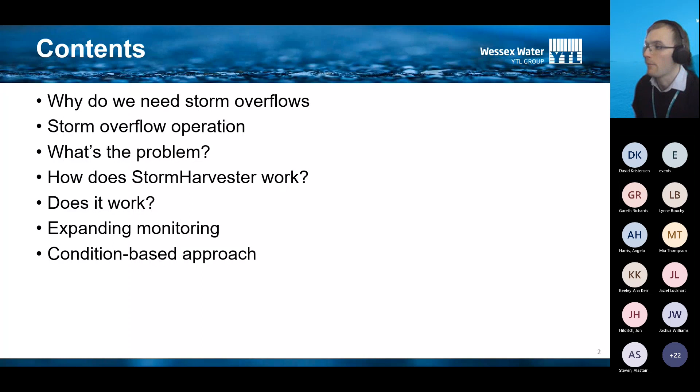As a quick run through of what I'm going to cover: I'll start with some background about the network, what's actually physically going on. Then I'll move on to what our problem is, the challenge we're trying to solve. Then how StormHarvester works, the program and the company. Then into the results, does it work? And then further into how we're looking to expand the work we're doing in terms of monitoring and also the condition-based maintenance approach.

So starting off with why do we need storm overflows. They're basically relief valves for our wastewater system, our sewage system. Hopefully this diagram shows a house and industrial buildings discharging foul waste into our sewage system, which flows down to the water recycling centre, or sewage treatment works. However, in wet weather, rain runoff from roofs and roads will also go in and fill the sewer, and hopefully most of that should also merrily flow off down to the water recycling centres.

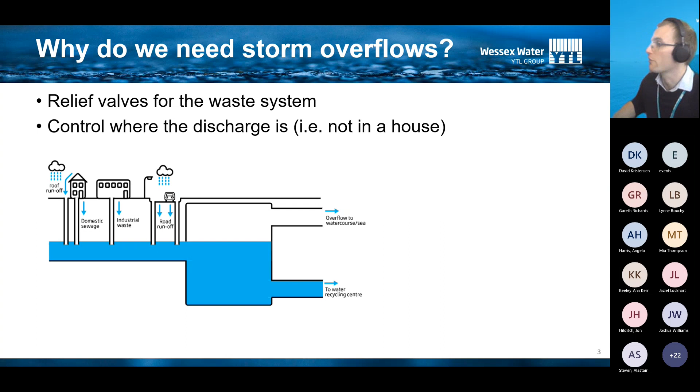But if there's too much coming in, we'll fill up all the capacity of our sewers, and they have to go somewhere else. So we discharge them to permitted locations, usually the sea, a river, a brook, or potentially a wetland like a reedbed wetland for treatment. The reason we do that is because if we didn't, and the system got over capacity and surcharged, it would have to come out at the weakest point, which would probably be someone's toilet, and then we have a customer problem, a public health issue. So that's roughly how the system works and why the storm overflows are there to start with.

I thought it'd be important to address why this gets into the news today, rather than just trying to avoid it. Basically, this links in because we're using StormHarvester to use the data we feed it with our storm overflow information, and that's why this is relevant. I'm sure you'll be more than aware of all the stories that have been in the papers and the press for the past few years.

You might have read comments about water companies dumping or spewing sewage into the seas or rivers. There are lots of negative stories out there, but that's misrepresentative, because we're not actually discharging a thick brown liquor into rivers or the sea.

In wet weather, primarily what's going out to discharge is rainwater, because we're filling our sewer capacity up with rainwater and storm flows. But it's not just rainwater, because much like if you had a bottle of Coke, drank most of it, and some dregs left at the bottom, if you then fill that with tap water, you wouldn't still have perfectly clear tap water left, it would be slightly dirty. Similarly, if we fill our sewers with storm water, what comes out from our storm overflows is going to pick up some of the foul waste in there too.

The major concerns about storm overflow operation come down to water quality, but simply stopping all storm overflow operations today, tomorrow, this week wouldn't necessarily have that big an impact on water quality. There's still work going on in this, but think about it sensibly: if what's going into the sewers is storm water, and what's flowing out from storm overflows is also rainwater, then the extra rainwater in rivers and the sea is not going to make that much difference to water quality.

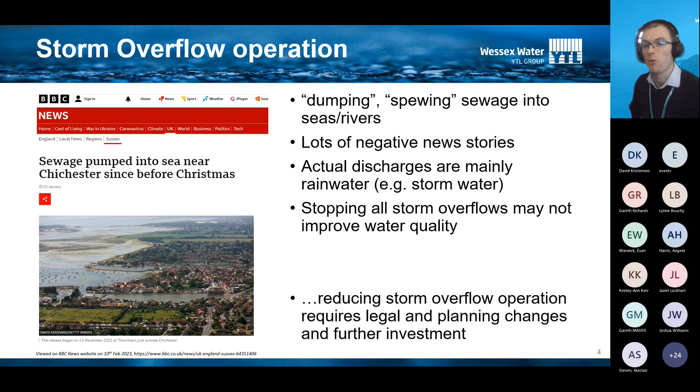So that's a bit of background about what storm overflows are, and I want to move on now to basically what we do about monitoring that, how we use that data, and how we're using it differently.

A quick bit about terminology - I'll try not to use any jargon, but some bits might crop up. EDM is event duration monitoring, it's storm overflow monitoring. CSOs means combined sewer overflow, foul and surface water. An SPS is a sewage pumping station, and a rising main is a pressurised sewage pipe.

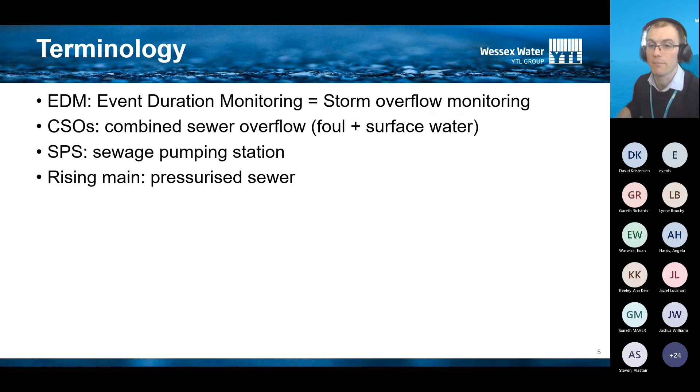Now our current problem is - this is actually a graph from last year - when we were first really trying to install our storm overflow monitors at scale, we had about 1,000 alarms coming in per month. About 2 years later, that's up to about 3,000 alarms per month. Last year it was about 5,000 alarms per month. Now it's between about 5,000 and 6,000 alarms per month.

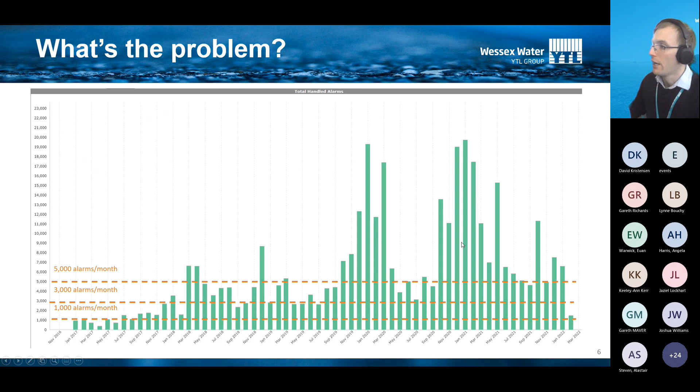Basically, you've got too many alarms coming in, and we can't deal with that. It's just too many to manually handle. So if there's too many alarms, we're going to miss the real issues. If we miss the real issues, then we have the impacts we don't want - that's when we can impact the customers, that's when we can impact the environment, and it's the stuff that happens that we don't want.

Also, I should point out, related to the previous slide, storm overflows are mainly rainwater. If overflows happen in dry weather, water companies aren't always in the clear here - pollutions do happen and they are prosecutable. So I'm not claiming that nothing ever goes wrong anywhere.

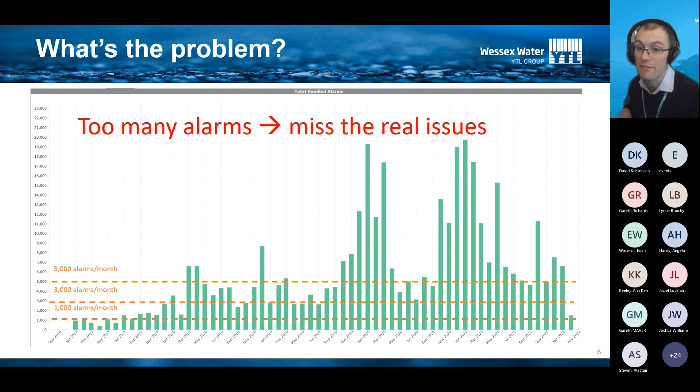As you can see, some more recent numbers from November, December and January - 26,000 alarms a month, 21,000, 26,000. It backs up the previous picture: there's too much data for us to deal with.

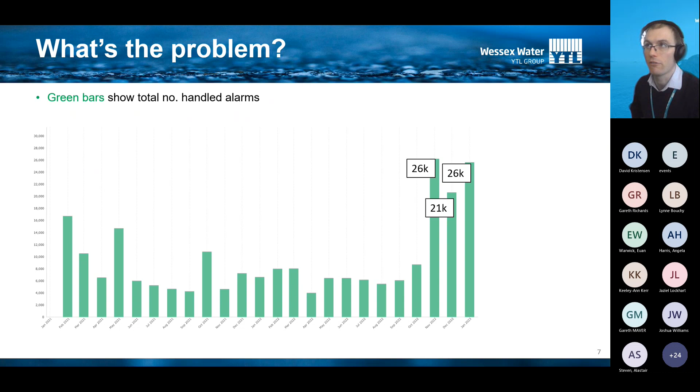So therefore we needed a way in Wessex Water of being able to handle all this information coming in and actually be able to do something with it, and then achieve better outcomes for everyone and for the environment. So after doing some trials of different companies and different systems, we opted to buy and use a product called StormHarvester.

What StormHarvester does is we've sent it two years worth of historical data, level data for sewer depths and tank depths and things like that. It learns what normal looks like by comparing it with rainfall, and then we feed it information on a daily basis, and it tells us whether things are okay or not.

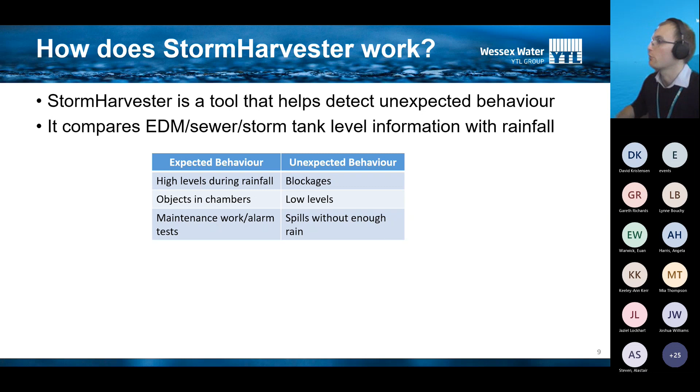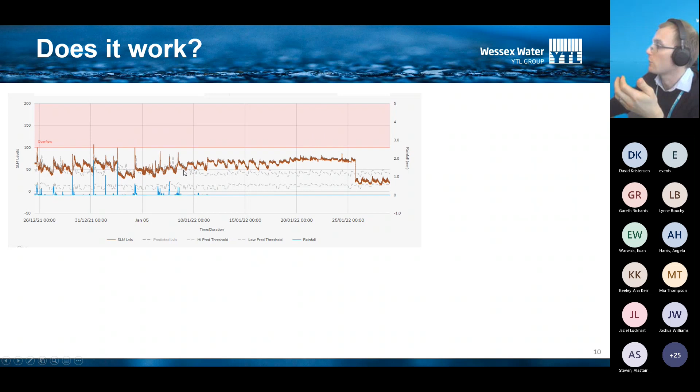Now on to some results. So does it work? Simple answer, yes. A few examples - this one, you can see the sewer levels bounced up and down. It starts really going outside the normal here, and then something happens. What happens? An operator went to site and removed a whole bucket full of rag and cleared a blockage.

In case you're wondering why it took so long to pick up this fault, it's because this site only went live on the StormHarvester system the day before, so it actually picks it up on the first day it could. Similarly, this site was working fine, normal down the bottom, then shot high, didn't get to this red zone here, which should be an overflow, a pollution at this site.

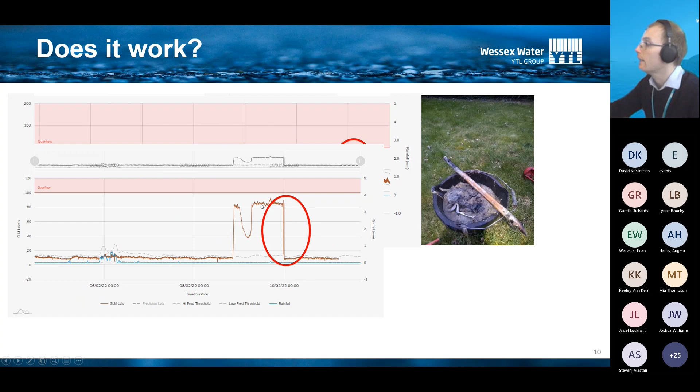So it didn't pollute, but then went down. What happened? An operator went to site, found a load of fat and a plastic bag causing a blockage, removed that, and then it went back to normal, as you can see here.

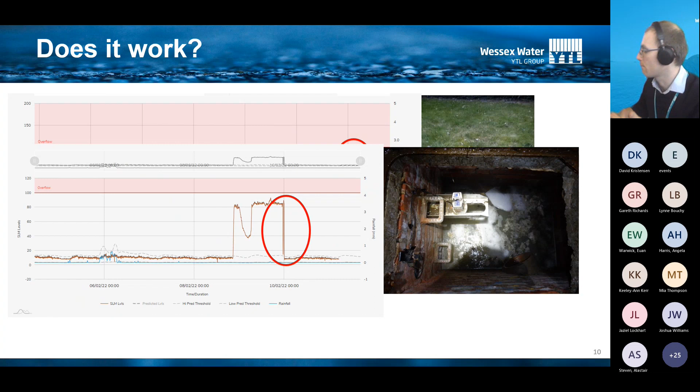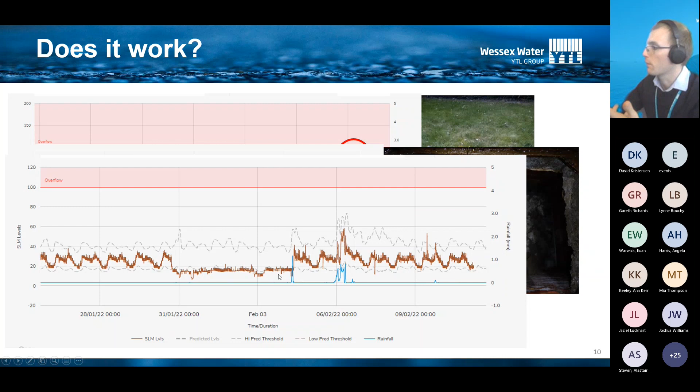One slightly different one - normal, staying within the grey operating envelope, but then drops below it. So what's happened? They went back up. What happened? An operator went to site and found an upstream blockage caused by grit and silt, removed that, and they went back to normal.

So that's what we're looking to go and do - we're looking to catch these problems before they have an impact on anyone, before they cause a pollution, before they harm the environment, before they cause customers any bother.

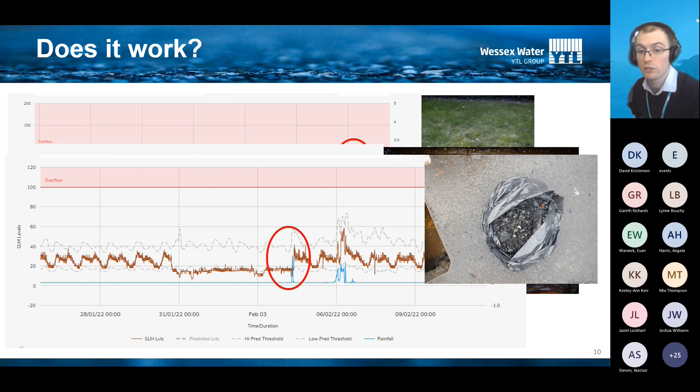The types of things we're picking up are blockages causing a full overflow, siltation - a slow blockage building up over time - and post-rainfall partial blockages. This one's really a highlight because these are the ones that are probably the most important to pick up and the most useful for us.

That's when it's absolutely tipped it down outside and we've washed into the sewers all the grit and the leaves and the mud. Then after the rain's dropped off and the flow's dropped off, some of that gets left behind and forms a small blockage, like a small weir or dam in our sewers, and then starts to catch more material. So that's the start of the next blockage, the start of our next pollution. If we identify those early and keep our sewer pipes running freely, then we're not going to have a pollution there. We're not going to have problems, which is really what we're aiming for.

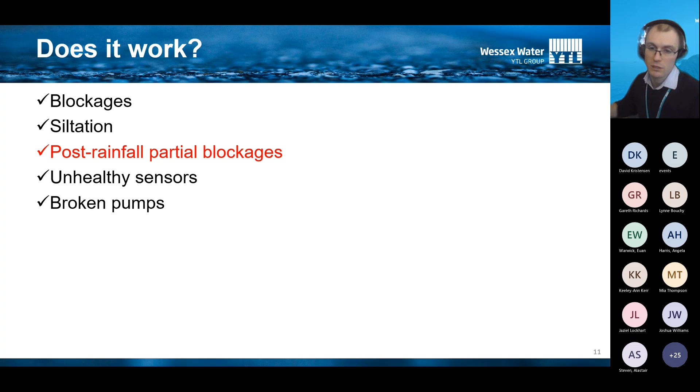We can also pick up unhealthy sensors, so the data's just done something suddenly unexpected - that's really helpful for maintaining our assets, making sure our telemetry system is working correctly, and also things like broken pumps, which again we can identify with changes in levels, things being unexpected.

So that's what we've been doing with StormHarvester to date, and on the back of the successes we've been having - I should mention we started trialing the system back in 2020 as part of a trial of 3 companies, and we've been adding sites in earnest since last January. What we're now looking to do, now we've realised we're having the successes we expect, is expand our number of monitors out there, so the amount of data we can feed into the system. To date we've got about 1,200 signals in StormHarvester, and we'll be increasing that up until summer, to something close to between 1,500 and 1,800.

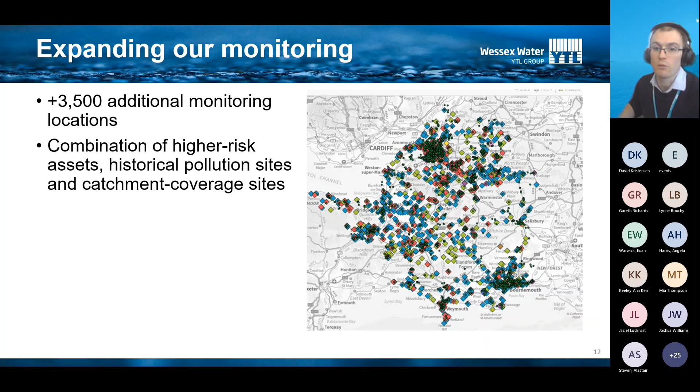But all this is feeding into a larger shift into a condition-based maintenance approach. At the moment we're more reactive, a mixture of reactive and scheduled maintenance - so we're fixing a problem, waiting for something to go wrong, we get an alarm when something's going wrong and we're reacting to fix it. What we want to shift to is condition-based maintenance, basically going from fixing problems to keeping the system healthy.

Because if we can have systems like StormHarvester that tell us when things are just drifting from normal, starting to act unexpectedly, then we can intervene early before it has any impact on the environment or our customers, or causes major failures. We can do nice planned slow-time interventions without rushing around or any panic or adverse effects. And that's really what we're trying to do - nice early intervention by early identification of problems.

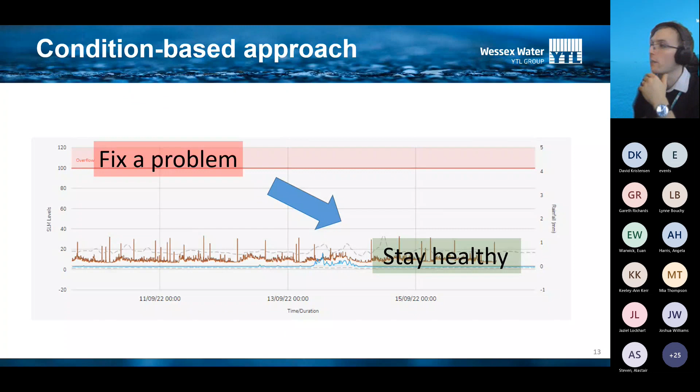This isn't just using StormHarvester - we're also using other tools, and we're still developing more. We've got a rising main burst detection system, basically using a bit of mass balance. So we're looking at how much flow is entering rising mains, and what's leaving it, and if there's a difference between the two, we're looking for leaks, to see where it's gone. Pump performance, again looking at pump output flows and whether they're doing what we expect. But as a whole, we're looking at changes of behaviour - if something's changed, that means something's going wrong, and that's where we want to go and intervene.

So with all of this, we've got a lot of data out there at the moment. We're looking for new systems to make better use of it, to inform our decision making and have more timely intervention. And that's the end of my presentation - I hope that's been useful for everyone.

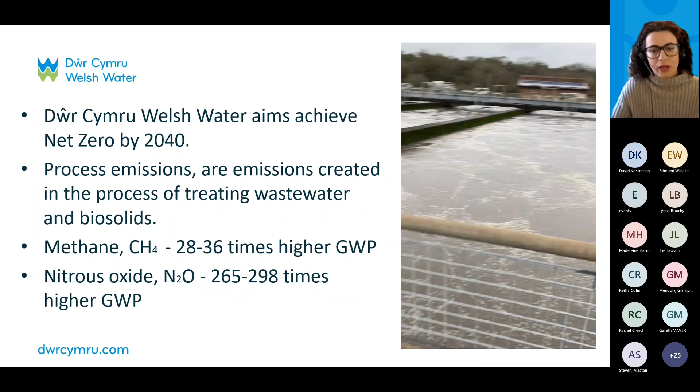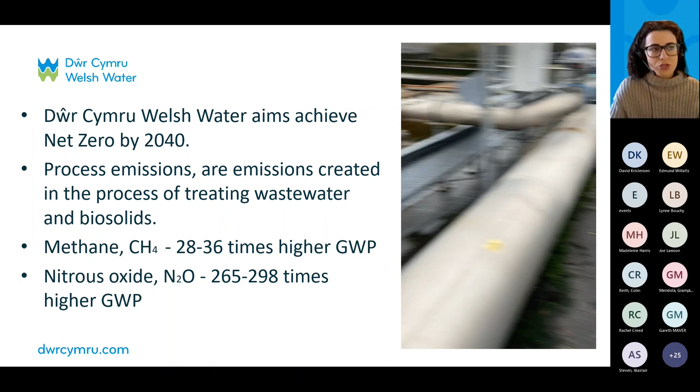In the process of treating wastewater, which you'll see in the video on the right, greenhouse gases are emitted, which we refer to as fugitive or process emissions. These emissions are mainly methane, CH4, and nitrous oxide, N2O. Both gases are of noticeable concern due to their high global warming potentials, being 28 to 36 times and 265 to 298 times CO2 respectively.

Global warming potential is a measure of how much energy the emissions of a gas will absorb. The larger the global warming potential, the more the gas will warm the Earth compared to CO2 over the same time period, usually around 100 years. Today I'm solely focusing on N2O.

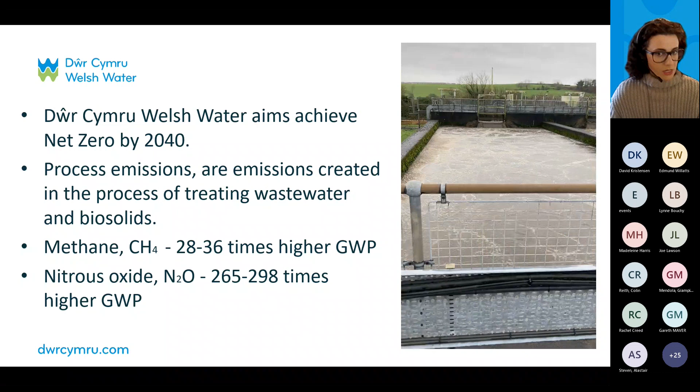So how is N2O produced? To answer this, we need to first understand the wastewater treatment process, as well as nitrification and denitrification. Wastewater is generally treated in one of two methods, either through filter beds or aeration. For this presentation, I'm focusing on the aeration method.

Put simply, air is pumped from the bottom of the aeration tank containing wastewater and bacteria, which keeps the bacteria supplied with oxygen so they multiply and digest the impurities within the sewage. In the images, I've shown what a standard aeration system might look like, and this is a close-up of the diffusers, where air is pumped through them and aerates the water like the video shows.

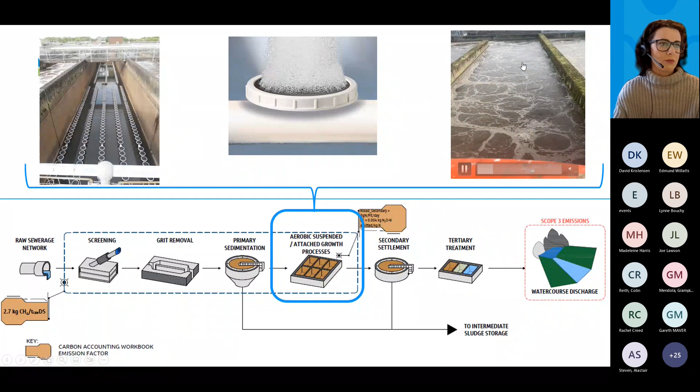Focusing on nitrification, this is the sequential conversion of ammonia to nitrite and ultimately nitrite to nitrate, and it plays an important role in the biological water purification of wastewater. Ammonia in wastewater could originate from a variety of sources, including proteins from blood, urea, cleaning chemicals containing ammonium compounds, and so on. In an activated sludge system or other biological treatment system, nitrification occurs under aerobic conditions.

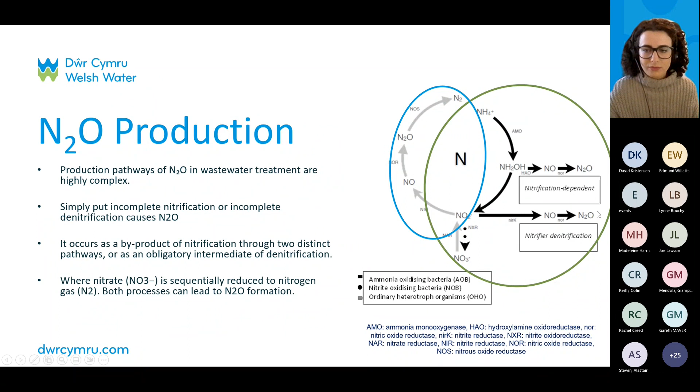Incompletion of either of these two processes, that can result in N2O gas, as conversion to nitrogen gas does not take place. These are some examples that can impact the completion of this cycle.

The main conditions triggering N2O production and emissions from wastewater are as follows: low dissolved oxygen, anywhere between 1 to 0.5 milligrams a litre during nitrification, and high dissolved oxygen concentration, above 0.05, during denitrification. Also, nitrite accumulation during both nitrification and denitrification, extensive aeration leading to stripping of N2O from the liquid phase to the gaseous phase (too much air being pumped into the wastewater), and limited organic carbon for denitrification.

In addition, temporary conditions such as anoxic-aerobic cycling, meaning no air, or fluctuations in substrate concentrations such as peaks of ammonium due to temporary loading—for example, a laundrette nearby putting in too much ammonia—can also lead to increased N2O emissions. The production pathways of N2O in wastewater treatment are highly complex.

Regardless of how a wastewater treatment works performs nitrification and/or denitrification, there will always be potential for N2O to be produced and emitted due to the complex metabolic mechanisms involved. Treatment processes that emit lower levels of N2O have been associated with high process performance and greater extent of total nitrogen removal. Thus, it's possible to reduce N2O emissions while improving process performance and meeting compliance.

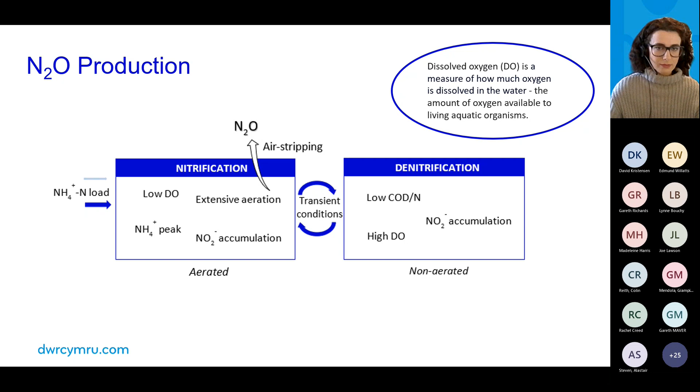For some background: UK Water Industry Research, also known as UKWIR, developed a standardised workbook for estimating operational greenhouse gas emissions, known as the Carbon Accounting Workbook. This brings consistency and accuracy to the reporting process across the water industry. The workbook has been in place for over 10 years and is updated annually to reflect the needs of the industry, including changes in carbon accounting practices.

In 2020, the N2O emission factor was adjusted by a factor of 2 in workbook version 15, which increased the total carbon footprint. Following completion of the research currently being undertaken in the water industry, and measurement trials currently being carried out by ourselves at Welsh Water, it's expected that the reported footprint will increase by a further 50,000 tonnes per year.

The water industry has been reporting under this, but for context, that equates to basically 0.9 million average annual car emissions.

For context, the location-based accounting method represents the carbon footprint taken at the average emissions intensity of the grids on which energy consumption occurs, whereas the market-based method reflects emissions from electricity and natural gases that companies have purposely chosen. As such, the market-based method reflects the emissions from the electricity and biomethane a company is purchasing, which may be different from the electricity generated locally.

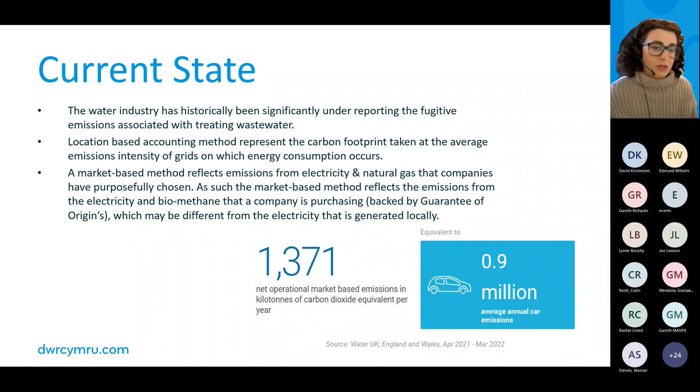In relation to the work we're carrying out at Welsh Water, we're currently looking at 6 of our wastewater treatment works with a minimum of 4 weeks of sampling. We've got 2 Unisense liquid phase probes installed in either one or multiple aeration lanes, and that creates a risk-based model and generates N2O emissions for the site utilising the site process data. I'll touch on how long we've been monitoring in the next slide.

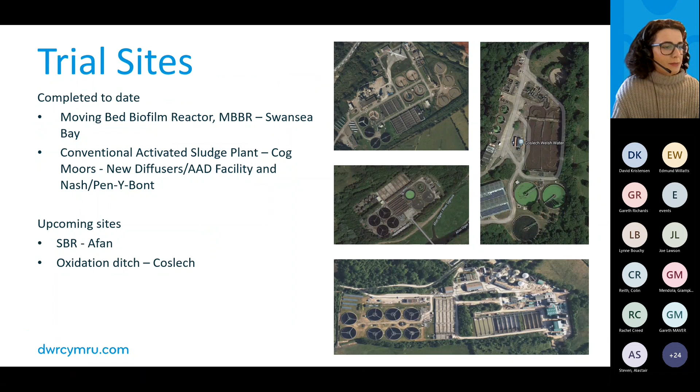Some of our key findings: at Cog Moors, which is a conventional aeration activated sludge plant, the site suffers from low dissolved oxygen, so the majority of nitrous oxide is associated with low DO risk. There's clear opportunity to lower risk and N2O emissions by increasing the DO.

We had a diffuser replacement, which I'll show the impact of in the next couple of slides, and that improved DO, resulting in lower N2O production and an estimated reduction of 47% if all lanes and zones have diffuser replacements. We've actually gone back to that site for further testing now that we've completed our blower and diffuser replacement.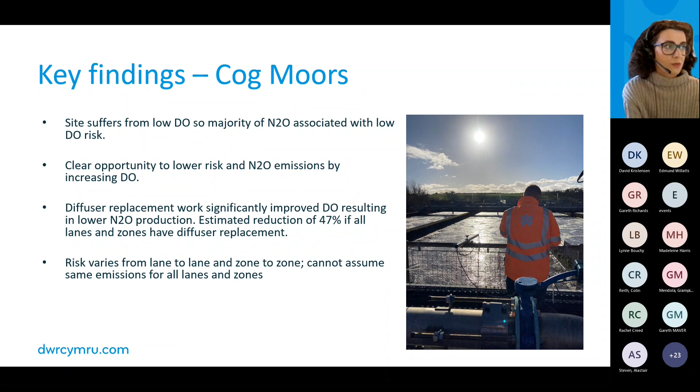Risk varies from lane to lane and zone to zone, so we cannot assume the same emissions across all lanes. We've been testing multiple lanes and multiple locations within those lanes as part of this further analysis.

Our key findings: lane 1 was undergoing diffuser change during the trial period to replace old and broken diffusers. The impact of returning lane 1 to service was seen across other lanes, with improvement in DO—whenever we brought that lane back online, we saw an automatic increase in DO across the other lanes without actually changing those diffusers at that point. There were fewer losses through the system from the new diffusers in lane 1, and that's why it improved.

This is evidence that better, more stable DO control is key to minimising N2O production. There's still work to be done on site, and we have some control software to improve the variation in DO, but initial results are promising.

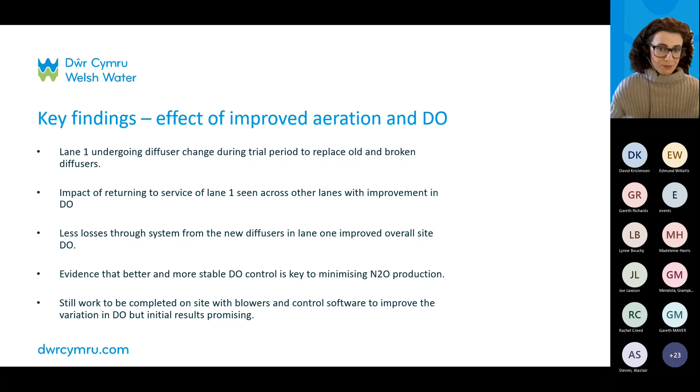Here we can see that when we replaced lane 1 and brought it back online, we had an increase in DO. Before the 25th of May, we had 186 tonnes of CO2 equivalent per year, and after it came back online, it was an estimated 35 tonnes of CO2 per year.

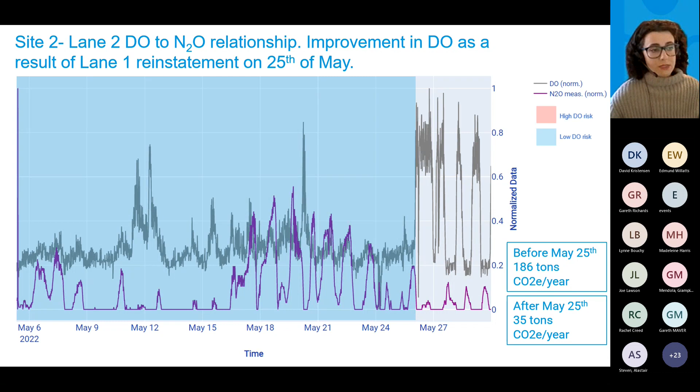Some of our other key findings were that there's a strong seasonal variation, consistent with existing literature. You can see the difference between a summer emission and a winter emission, and this shows our temperature history across one of our sites. We also have aeration control.

Early results show our Pen-Y-Bont site has a low N2O emission, and this is backed up by fellow consultants. Aeration control, which Lynne might touch on, so I won't go into too much detail, but essentially it's a system you integrate within your aeration system to make sure your blowers are running efficiently to treat the wastewater.

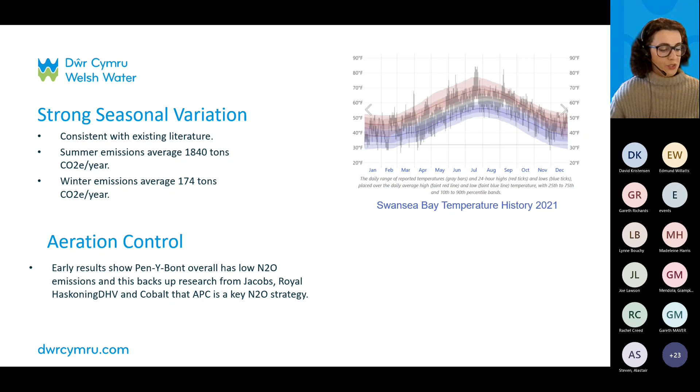So to summarise, how is data helping Welsh Water's journey to 50% process emission reduction? It's playing a vital role, helping us improve our understanding of N2O emissions with accurately modelled and real-time data, particularly when compared to the theoretical values currently used to estimate emissions.

It's allowed us to financially plan for mitigation and monitoring strategies in PR24, using the learning from the Cobalt Water solution to cost for a much more affordable monitoring campaign than the conventional monitoring approach would require.

It's improved our understanding on nitrous oxide emissions across several asset types by using real-time monitoring technologies and developing advanced learning models, and it's helped us understand what improvements can and should be made for our processes to reduce nitrous oxide emissions and demonstrate the use of process changes for emissions reductions.

And thank you all for listening.

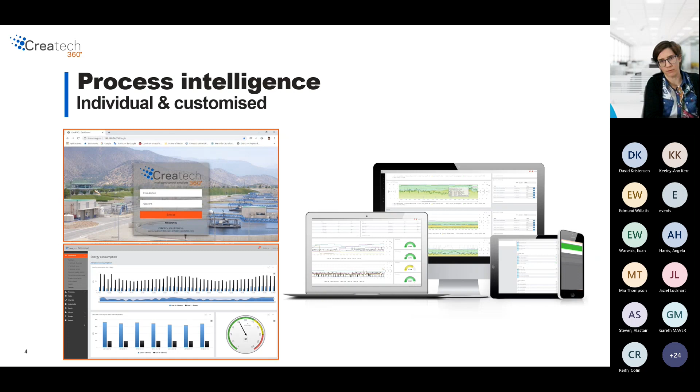So that's the first level of what we do with the data that's received on the platform. The second is the control. So process control can be applied to a number of different process units of a water or a wastewater treatment system. A very common one is aeration control, which Katie mentioned before.

There are a number of types of tools that we can use to use the data that is received by the system online and then produce an order to the equipment that is being controlled. What we aim to do is, as I said earlier, focus on a process rationale. On that basis, we will define what logic tools we would need to implement to be able to put in place the control philosophy that we've defined.

So that may be PIDs, rules, for example, linked to manufacturer recommendations of equipment, and then a number of other tools like fuzzy logic, which we've been using increasingly, and artificial intelligence and machine learning. I'll give a few examples of that in a particular case study.

Either way, whatever type of tool is implemented, there will always be one sort of across the board philosophy, which is the point of the game is to try to adjust how you manage that process at every moment in time and adjust to how it's behaving, what incoming loads might be coming in. So it's really trying to tweak it as much as you can in real time, but without having someone having to tweak it physically. It's the system doing it online.

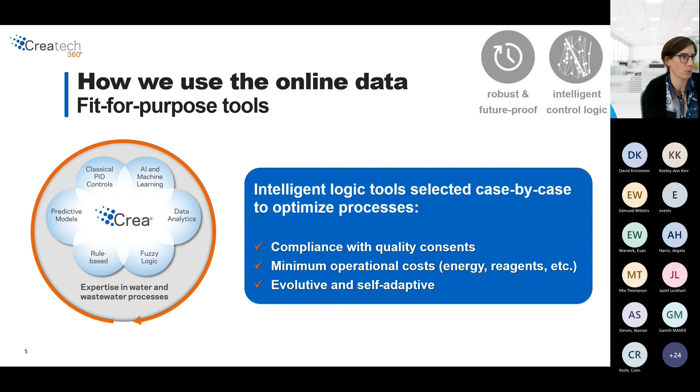So very self-adaptive is the point. Because we really build things on a process rationale, it means we also try to have an overview of the whole site, and we will build in the control any synergies that there might be in the process. So those might be synergies within the site, for example, on aeration, the air demand and air production side of things.

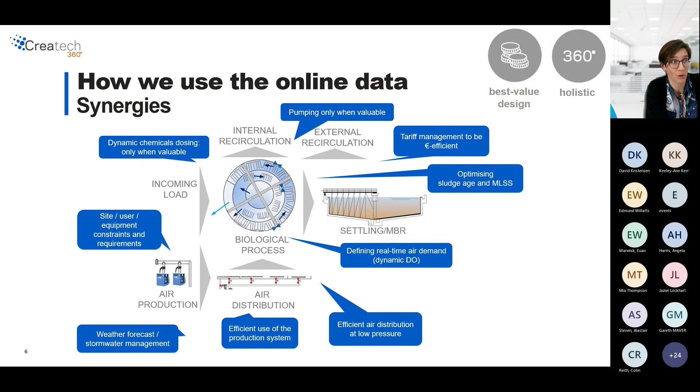But also using data that's coming from off the site. That might be weather forecast data, useful sometimes to have a bit of an early warning on about incoming loads. It can be power tariffs, a triad, for example, that will also help you give indications on when it may be more expensive or cheaper, and therefore adjust within the leverage that you have, adjust your process accordingly, etc. So very wide applications, and every case is different, every site is different, and every story is different, and the objective of each installation is different as well.

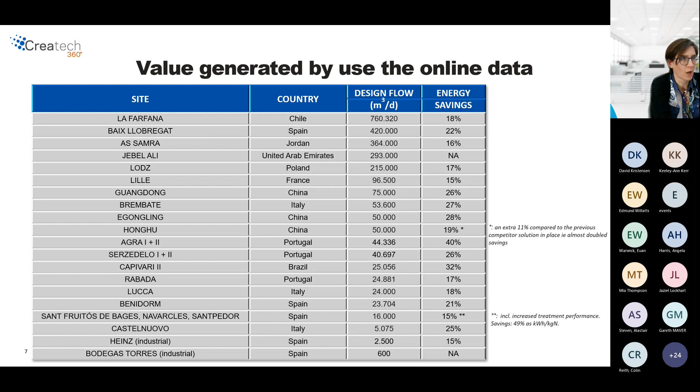So you do get a broad range of applications, and this is an example of selection of installations that were carried out. Those are on aeration control, and those were mostly sites that had an objective of energy efficiency. So to bring this a little bit more down to earth, I'll detail one particular example.

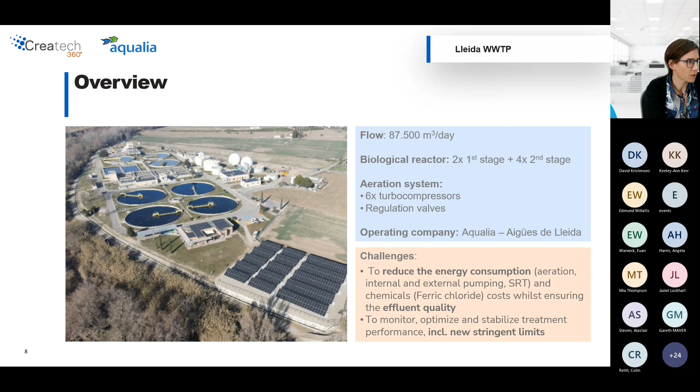Which is the wastewater treatment plant of Lleida. So that's northeast of Spain, rather a large site, so it's almost 90,000 cubic meters per day, so quite a good size site. Switch here to explain the process.

So the aeration control, the aeration process that Keeley mentioned before here is operated in 2 steps. So you have 2 plug flows for the first step, and then a second stage with 4 plug flows, and then settlement tanks, and towards final effluent release.

This particular site had the consent limits that are indicated here, so carbonaceous, and then a total nitrogen limit of 15, which is fairly usual in a lot of Europe, and then a total phosphorus limit of 1. Phosphorus was only intended to be removed chemically within this design of the site. So initially, when they were starting to look at optimization and process control, they were really only focusing on optimizing from an efficiency point of view, both energy efficiency and chemical usage efficiency.

And then what happened is that their consent limit got reduced from 15 to 10. So then there was an added objective, which was to improve treatment performance as much as possible to try and avoid any extension, so essentially capital costs for new build.

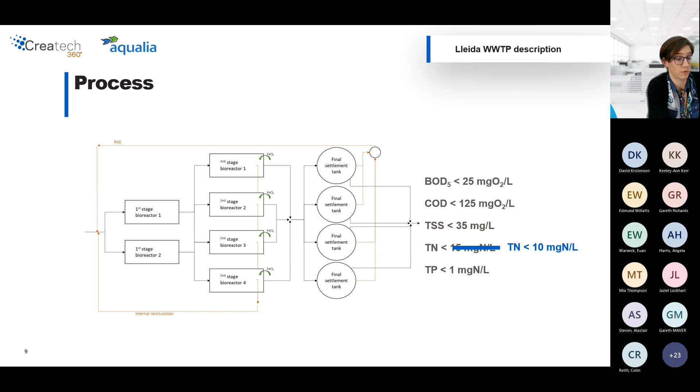They really took it step by step to go through optimizing a number of different areas of the site. It's quite an interesting site to show, because in one single site I can show several things. It's not to say this is typical of what's done on every site, but it does give you a bit of an overview of what they've done.

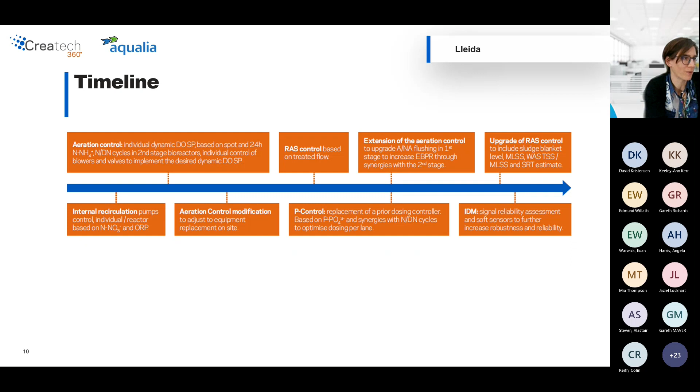They started initially simply by producing data, so installing instruments for measuring online in a number of intermediate points of the wastewater treatment plant, and then at the effluent as well. And that was helping them adjust manually some of the set points.

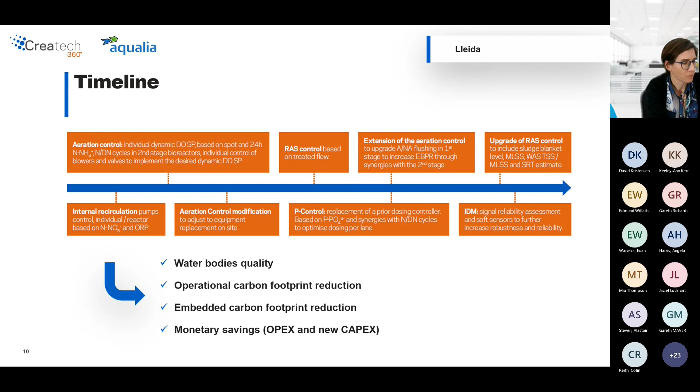The next stage up was when we started working with them to go towards online advanced control. I won't explain all of the details of the process control, because on this site there is quite a lot, and that's not the point here. The only importance of this graph is just to show that, as I mentioned before, everything's intertwined. Processes are linked, and therefore the control is also interlinked.

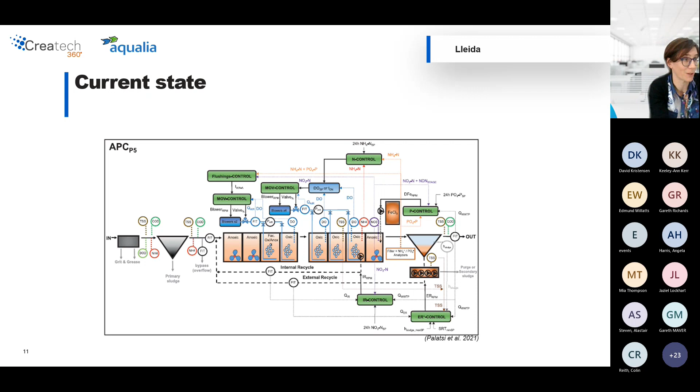So a few highlights of what's been done there. I mentioned earlier the biological stage. The biological treatment is in 2 stages. We're controlling the aeration on both stages, but in very different ways, because they have completely different targets. The second stage, the 4 plug flow reactors, is focusing mainly on nitrogen removal, and as it's a total nitrogen consent limit, we're looking at nitrifying and denitrifying.

During nitrification, so aeration, you will have this dynamic oxygen set point, which will depend on a number of online data signals. We're looking at ammonia, we're looking at nitrate, and we will also look at some criteria that are built with those particular signals, so not just the signal itself, but, for example, a 24-hour average of ammonia, because their consent is 24-hour average. So all of these inputs are inputs to a fuzzy logic matrix that gives us an output, a dynamic oxygen set point for that particular lane.

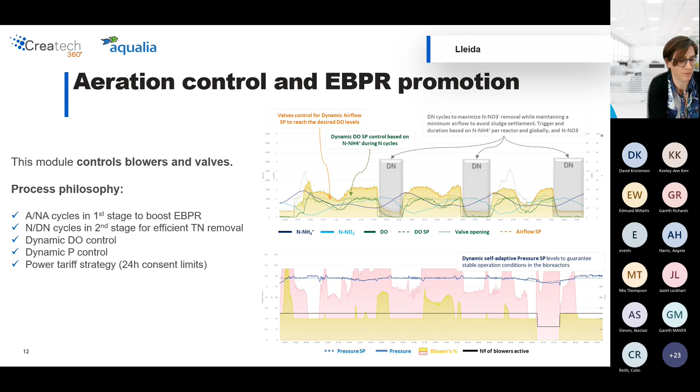So that's an overview of the aeration. We also work on the sludge line.

As part of the aeration process, you recirculate part of that concentrated sludge and the microorganisms back into the aeration lanes. Here you want to have a sludge that is the right amount for treatment purposes, as well as a sludge that has good settling properties, etc.

Here the aim of the game is very different. It's not so much about efficiency in terms of savings, it's more about stability of the system. So we're looking at completely different sets of data, different sensors: level of solids in the aeration lanes, in the recirculation streams, flows treated, etc.

But again, using a fuzzy logic tool to have all of these inputs that will then give us an output, which is what flow rate should I make this recirculated sludge pump run at.

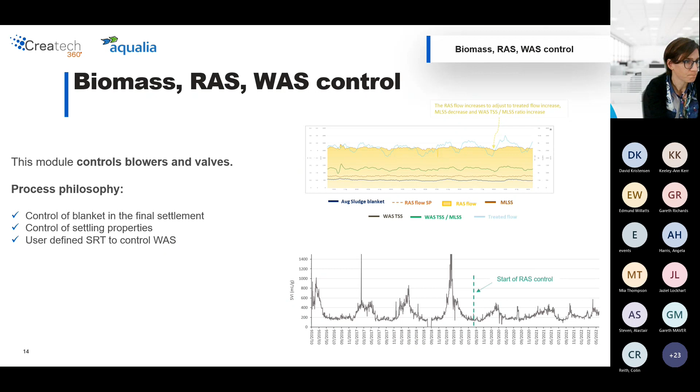And lastly, chemical dosing. On this site, they use ferric chloride for phosphorus removal. Part of the phosphorus removal we try to do biologically as much as we can, but the fine tuning to reach the consent of 1 in total phosphorus is done with this chemical dosing.

Initially they had a simple system that was just reading online levels of phosphate, and on the back of that dosing the ferric chloride. There are 4 dosing points in each of the aeration lanes, and it was dosing the same amount in all 4 lanes.

We upgraded this by looking at other parameters, for example, not only the phosphate at that moment in time, but also trend and 24-hour averages, because that's in line with their consent.

And also really using the synergies between chemical removal and what is happening from a biological perspective, because whether you're aerating or not in those lanes will impact how much phosphate might be available in each of the lanes, and therefore it doesn't make sense to dose the same amount in all 4 lanes. It really depends on what's happening in each and every one of them.

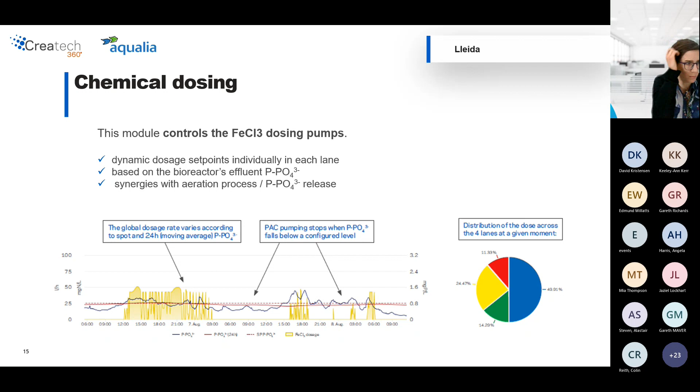So all in all, with a number of these process control items, they managed to reach that new level of consent without any new build. That was actually maybe the best win.

And then in terms of energy efficiency, 22% savings for energy in the whole aeration process, and then savings in terms of chemical. I've written it there in terms of kilowatt hour and kilograms of chemical. Obviously, there is an environmental impact as well.

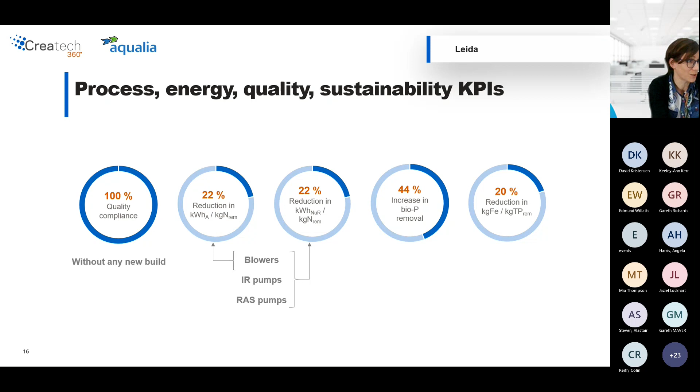The last layer that they implemented on this site, this module was implemented a year or so ago, is not so much about the process control, it's about the reliability of the data. Because if your control system is using an input which is signals and combinations of signals or calculations you're going to make on those signals, you need to trust those signals to some extent.

And this is what this module does. IDM stands for Intelligent Data Management. What it does is take all of the key signals for that particular process control and analyze them using a number of different functions.

Online, and it will then rate it with a percent reliability. If that reliability falls below a certain level, then automatically the system will discard that signal, trigger an alarm, and start using an alternative method, because the output of your control can't be reliable if the input isn't.

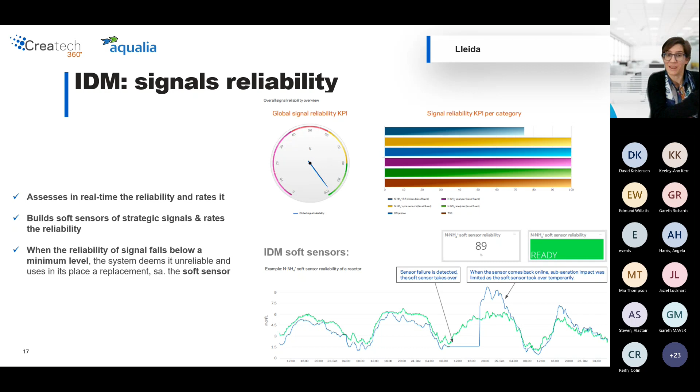So that if the physical sensor fails, as you can see when it goes blank and freezes to a certain value, then the system discards it and uses the soft sensor instead. Then when the instrument is repaired and goes back online, you can switch back to using the actual physical instrument. So it gives you that extra level of robustness of the data and therefore of the control system.

And that was everything I was planning to explain today. So I hope that was interesting for all, and I'm happy to take any questions.